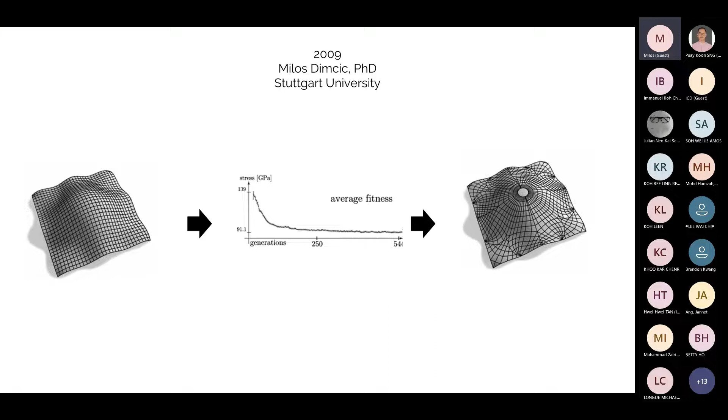As a very basic example, this is a slide from my PhD, already 13 years old now, that shows that if you take a simple input like a grid structure on the left, and you say my task is to optimize this, as an output I get a more optimized structure that costs less, is lighter, and so on. That is an example of that function. In my PhD I showed that with the same number of structural profiles, with the same exact shape of the free-form roof, we can get 3 times less displacement in the structure, 1/2 of the stresses in the steel profiles, just by doing geometrical optimization of the grid.

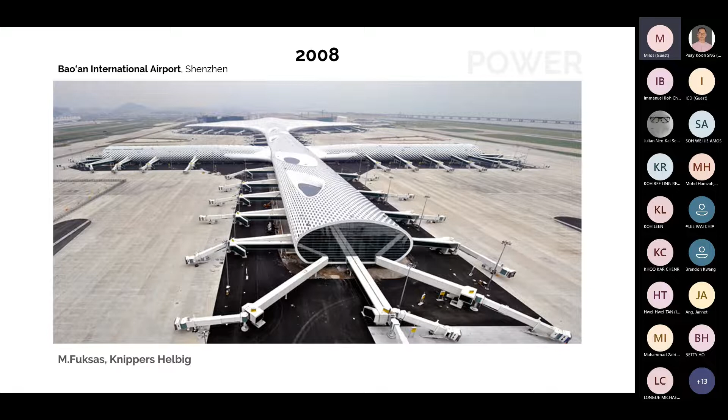So that was an example of theoretical work, but automation is not only about optimization. During my PhD, I worked on this airport, designed by Massimiliano Fuksas in Shenzhen, China. There, everything had to be done parametrically, because it was a free-form shape with a lot of unique elements, and no one could do that manually. There were 300,000 square meters of free-form surfaces. We had these hexagonal panels, relatively complicated and big; one hexagon was like 4.5 meters wide and 3 meters tall.

And there were some additional constraints. We had hexagonal panels on the inside of the airport and on the outside, and the glass surfaces on the outside had to be always flat, which is a challenge because you're populating a 3D complex shape over a freeform surface. Additionally, we had like 20 types of hexagons for which Fuksas literally painted on a canvas which type should go where. We transformed that canvas into Excel tables and then into an algorithm. I could do a 2-hour lecture just about that. But coming back to the question, does automation pay off? Yes, because for the entire airport, we did a complete regeneration of all the facade elements, of all the structure.

Remember that this steel structure in between that you see, it was also generated parametrically. So we did it every week for more than a year. I think we had 72 generations. We regenerated all these facade elements and the entire structure completely from zero, which took just a couple of hours to do. And that shows the power of automation and answers the question, does it pay off?

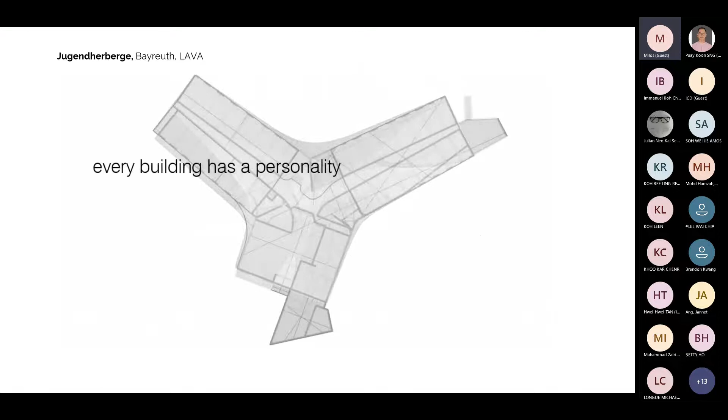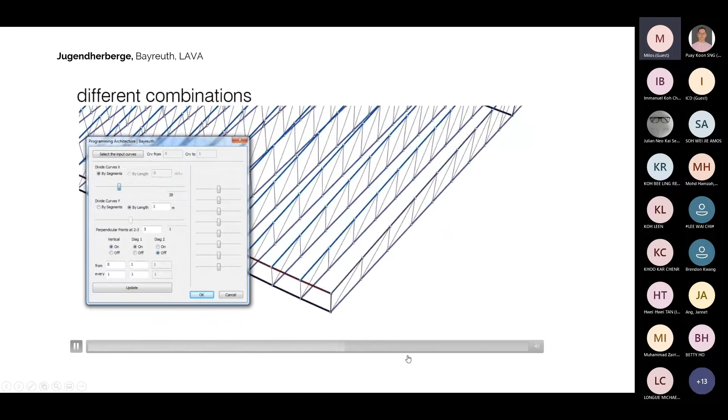We do that sometimes. Sometimes we do parametric design. This is a very old example where we actually had to write some algorithms to explore some design solutions for the structure and so on. This is very early on. This is, I think, even 2011 or 12. But I show this example to accentuate that we do this almost never.

So we do programming after the design is done in order to help actually build the project. That's why I write that this is very rare and that we almost never work with architects, which is the sad truth, and I hope in the future we will do more. But by the end of the lecture, you will see my view on it, and you will understand why we don't work with them that much.

So the question is, who do we work with then, if not with architects? Well, as you know, each project has a lot of phases from the design until it actually gets built. And some of them are static analysis, MEP, HVAC, production. When I say production, I mean the actual production of different elements, steel elements, columns, beams, and so on. So there are a lot of stages, and we usually come at a later stage after the design is over and try to automate everything until the very construction site, even some things at the construction site.

So we try to create these bridges, and you will see in what manner we try to do that. But that's our job. And as I said, we rarely do the design phase.

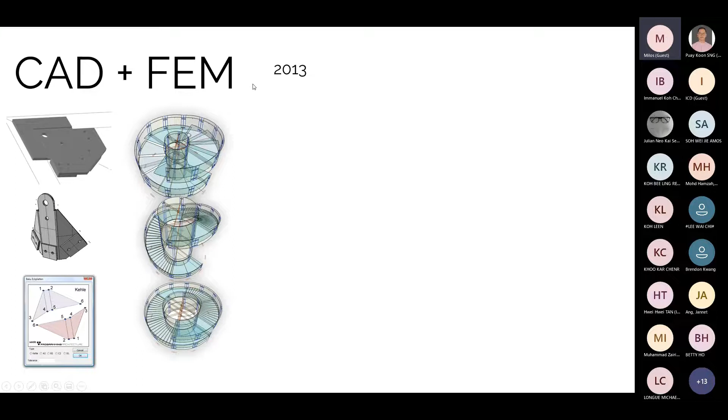So one early example, also from 2013, are these Apple stairs. We did a study because for the Apple Store stairs they did a lot of these models, where they make these completely glass stairs, but the problem was always that they had to do geometrical models and statical models in parallel, and they were always different because the dimensions changed a little bit. So we made this parametric model where not only the geometry is generated automatically, but the statical model is generated at once. So we kind of wiped out the 8 or 9 weeks they needed to build a statical model from scratch every time a new stair design came in.

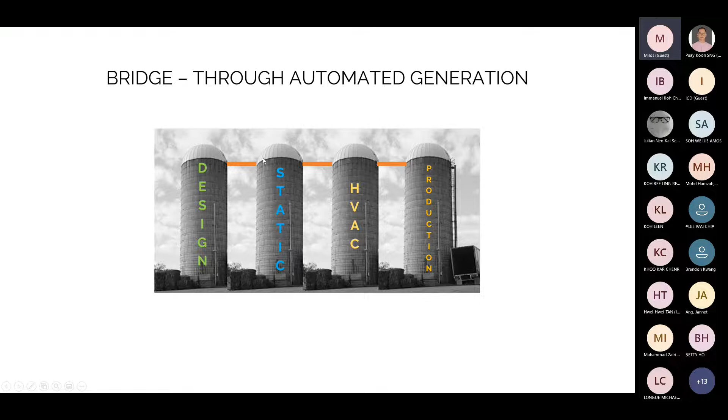So that was an automation where we automated the static analysis, so the building of the static model. If you remember the first slide, the problem is that our industry is siloed. Which means when someone designs something, they give it to the structural engineer, they start building their model from scratch, and so on. So we try to create this bridge by automatically creating a design model and a static analysis model.

So we, for example, made algorithms that automatically read these thousands and thousands of STEP files with these panels, and then had to smartly recognize where each panel fits in 3D and then push it into 3D and so on. And we found a lot of mistakes, actually.

A lot of panels had to be reproduced, but we saved a lot of money by finding those errors before the construction site.

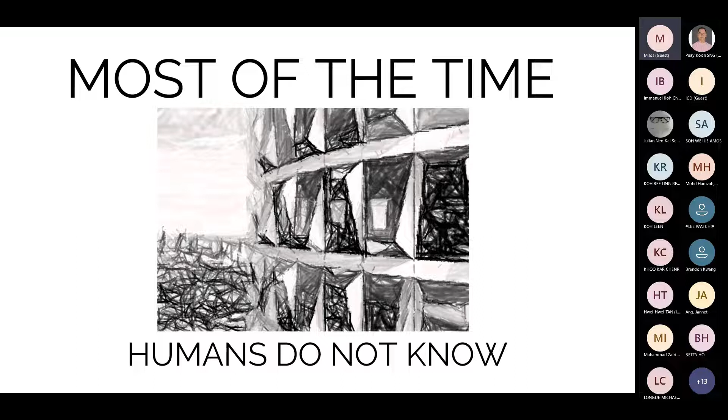And when it comes to programming, most of the time we don't program just the things that we know how should be done. We just need to automate them to do it faster. But we have to program something to answer questions to which we don't know the answer.

Some of these questions came out in this Schüco parametric facade system, for example, that we did together with Engelsmann Peters. And the problem was that Schüco developed this parametric facade system where the architects could choose a type of the facade element. This triangle here is one type. This here that you see is a different type.

And every type has some points, in this case these 2 points here, which architects can freely vary. That means that architects can take these 2 points and move them around for every facade element, and the facade could still be produced at a fairly low cost.

But then the question arose of static analysis, like how do we know where the architects can move those points, what profiles do we need, and so on. So we had to create algorithms that would test different kinds of shapes. We would generate literally hundreds of thousands of shapes like this and automatically do the static analysis for them, a

very complex static analysis. And then we would create green clouds of points where the architects can move, or we would give them different types of clouds for different types of aluminum profiles so that they can choose what they do.

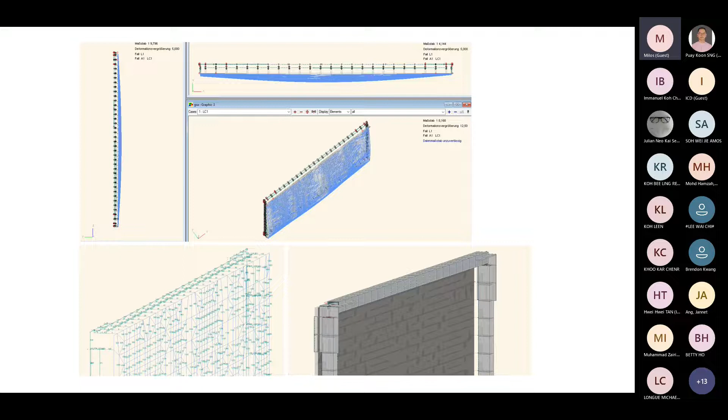A similar thing we did for this Chadstone Mall in Melbourne, where we had a lot of these glass panels, all unique because it was a free-form shape. And then we found out that the standard method to do the static analysis of a glass and determine the thickness of the glass was to choose approximately 4 or 5 glass elements that are considered to be worst case, do a static analysis for them, and then apply that result to all the glass panels.

And we said, okay, why don't we make an algorithm that just tests statically all 3,300 panels? So we did that, and we tested them within a few hours, and then we found the actual worst cases, so we didn't have to approximate them, and we could also make glass thinner at some panels and so on if needed.

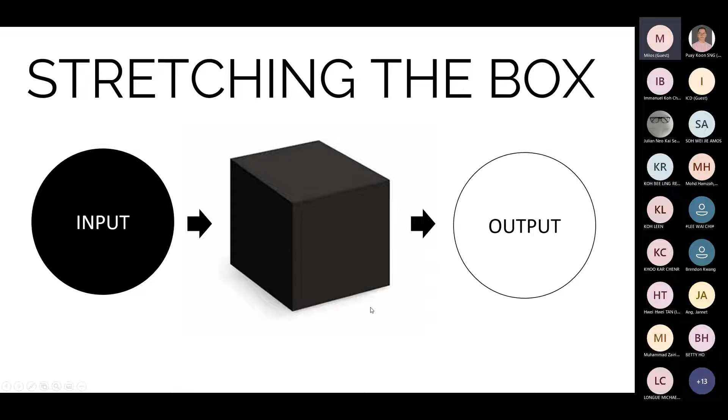So those were some of the examples where we got some input and some output out of the automation. But the question for us is always how much can we stretch this box? Like how simple can the input be, and how complicated can the output be, so that we automate everything in the middle. So on that road, we try to automate a lot of production elements.

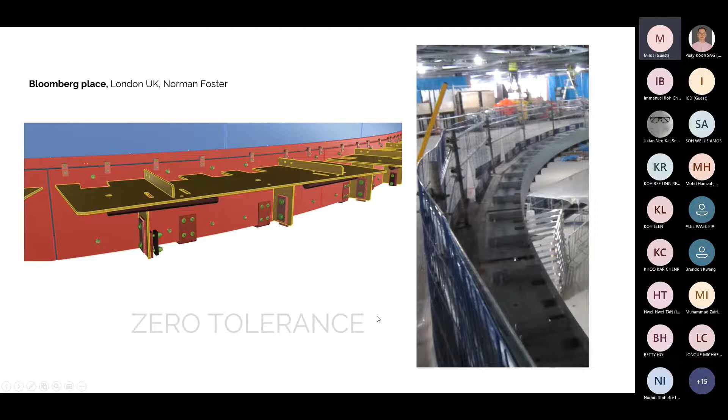And there was zero tolerance. We generated them with less than 0.1 millimeter precision. And we didn't generate only 3D, we generated also 2D drawings just to check on the site, but also all the CNC files for cutting. So everything automated. And in drawings like this, as you can see, with all these measurements, everything was generated automatically. So nothing on this drawing was drawn by a human.

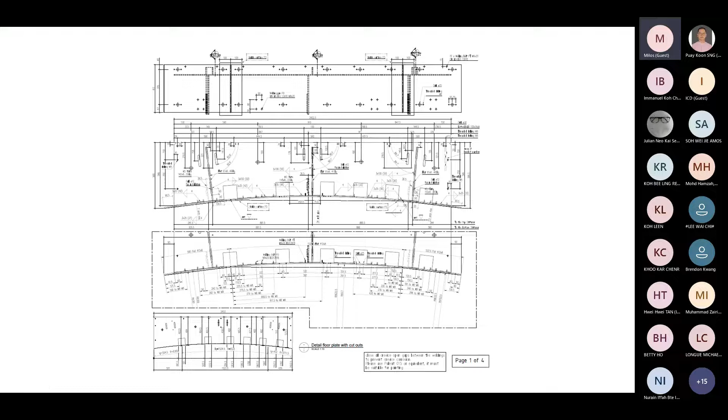I am really against 2D in general, as you will see in a while, but sometimes we had to do this. We try not to do this anymore, but if needed, that can be automated as well. On the Kuwait airport by Foster and Partners, we did a lot of automation as well.

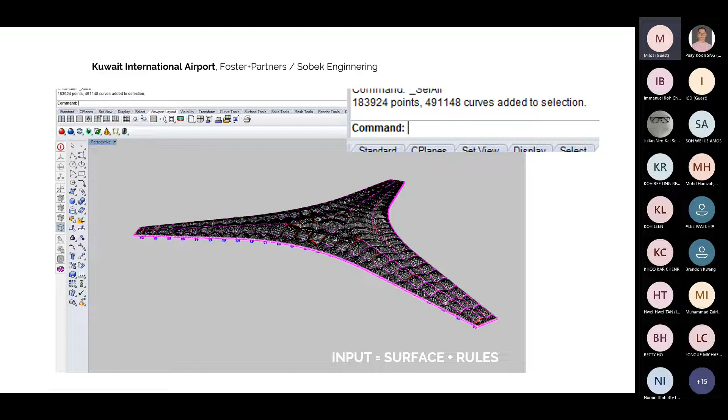It's a very high span concrete shell with steel structure, so it was a very big structure. And as an input, we also got simple surfaces and some rules. As you can see, these are very high numbers. These curves here, almost 500,000 curves, basically represent steel members, and in between those steel members was the concrete. We actually had to generate the entire rebar, the entire reinforcement for the concrete elements, with a lot of rules and a lot of automation. The inputs were fairly simple, just some surfaces and some outlines.

So BIM in itself is also automation. BIM is an attempt at automating the tasks that we used to do before. Before, you used to just draw in 2D, and we used to transform that into a 3D building on the site. BIM tried to automate that by letting us create a 3D model and then automatically create sections and plans and bill of quantities for us and so on.

And the reason why I say this is not good enough, for me at least, is because we have this weird thing of creating very complex 3D models, translating them into 2D drawings, and then translating those 2D drawings back into a 3D model. So from my point of view, this middle part has to disappear, and that's why 2D has to disappear from BIM.

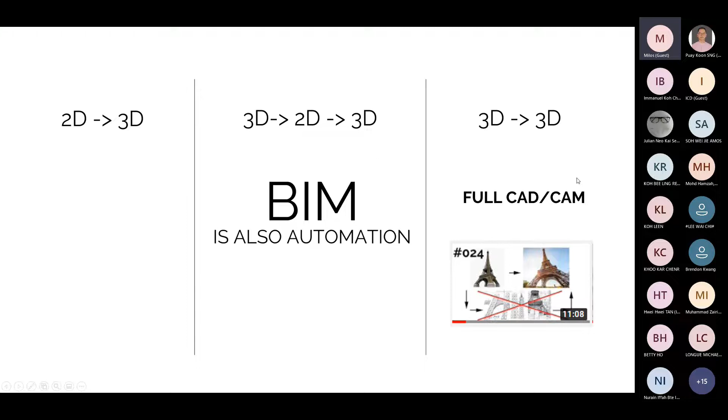And we are moving toward the 3D-to-3D kind of process, where we really try not to use any 2D drawings because we find them confusing and not helpful at all. I did make a video about it recently on my YouTube channel where I talk about it in more detail. But as I said, we don't just talk the talk, we walk the walk.

There is a project we work on right now, and unfortunately, because this is a public lecture, I cannot show anything about it. But it's a very high profile, extremely big project. It cost $2 billion. And in this project, there is an enormous steel structure, and on that steel structure, there's a secondary aluminum structure, tertiary aluminum structure, then some LED screens on it, and so on. So it's very highly complex, but we do not use 2D at all.

So we generate a structural and production model simultaneously. The civil engineers don't have to do anything, don't have to do any modeling. They just get complete models from us, and just have to press calculate, analyze. And there are a lot of structural members—as I said, more than 30,000, more than 90 million works.

Work is a term we use for the G code for the machine, because for every profile that we make—which is all of these 30,000—they're unique for different reasons, and we automatically create G code. So every drill on this profile, every cut, every mill is a work. There are more than 90 million works that are automatically generated, and all of these profiles are then mass produced in a machine.

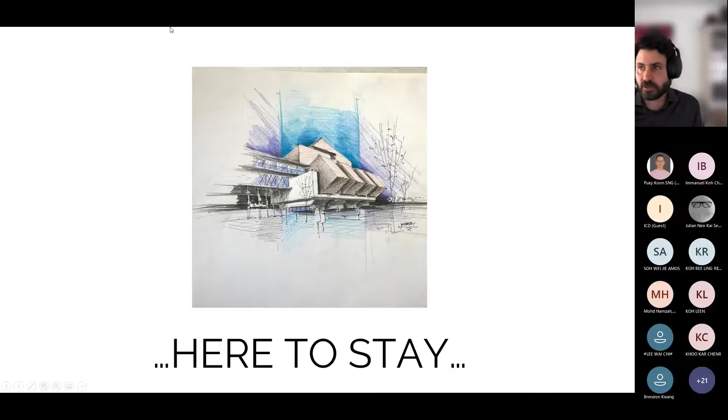In the development of AI, we had a lot of famous events and steps. For me, the interesting thing was that after chess being played human versus human for such a long time, and then human versus machine, where machine finally in the 90s took over, now no human can compete with any machine when it comes to chess or even Go.

The interesting thing for me to learn was that a human-machine team, a human together with the AI, could still beat the AI. That's something when it comes to chess and similar games.

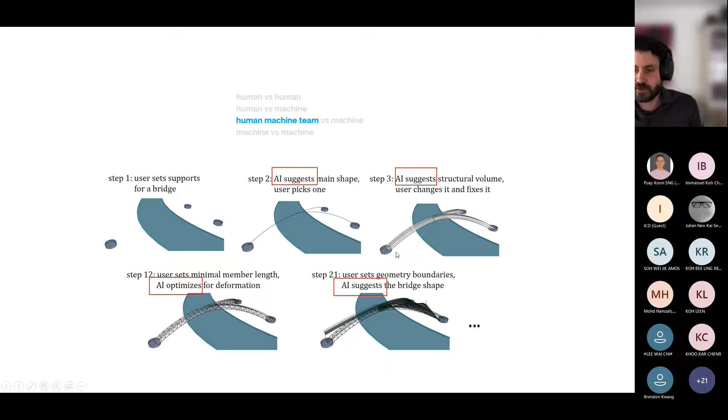Then the user would pick some, then AI would maybe suggest some structural volume, then the user would adjust or fix it. Then AI would maybe optimize a structure over that structural volume. Again the user would choose some, adjust some, pick some of them, and continue this process, refining the model until they came to a solution.

So what they would be doing is playing purposefully, in the sense that the design exploration by the user could be controlled—not necessarily in a bad way, but helped along by the algorithms.

We should use the tools that are already here—that's the point I'm always trying to emphasize. I think Buckminster Fuller and many others have noticed that the construction industry lags behind other industries, and that we usually need 40, 50 years to start using tools already used elsewhere, like robots used in the car industry since the 60s, 70s—we just started using them 10, 15 years ago. There are lots of tools already here; we just have to use them.

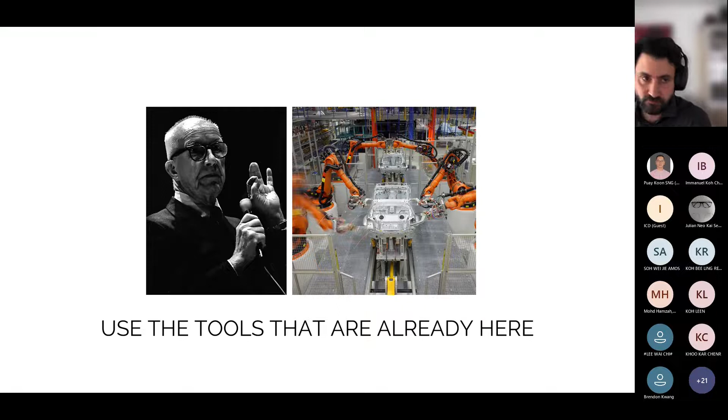And because the design itself is a selection of ideas, I think when we design, we do not have time. We can test 4, 5, 6 ideas, but then we do not have time to test more. Automation can help us merge ideas and automate this process, whereby we could test as many ideas as we can in the beginning, and then come out with more creative solutions.

So I think I'm almost at the half an hour mark, and with 2 more minutes, I will finish with this.

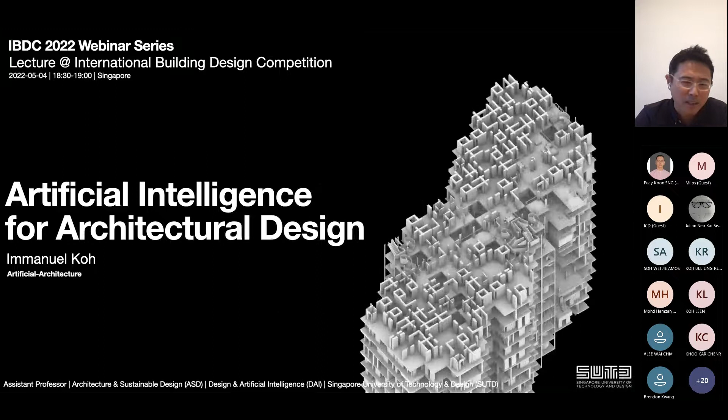So most of the projects that I'll show will be focusing on the more generative aspect of it, more experimental, more speculative, rather than the other more serious work. Serious meaning can be quite boring, so I'm not showing that many of them. So these are some of the kind of work that I do, some topics that I've been looking at in recent years.

If you look at the kind of work that I do, it's a spectrum: more art and design scenarios, such as exhibitions and events like the architecture biennale, and even book design, which won the Golden Pin Award just last year, and also a bit more serious projects that appear in conferences such as the International Conference on Computer Vision, ICCV, quite a high profile AI conference, and other more neural architecture related projects like this one. And of course, NeurIPS, which is also quite a high profile AI conference.

The industry projects include the one from URA, MINDEF, and also the resource support from the National Supercomputing Center in Singapore. So for those who are curious about more recent writing, apart from projects, some projects will actually appear in these publications. You might want to check out some of these. These are very recent, half of them from early this year.

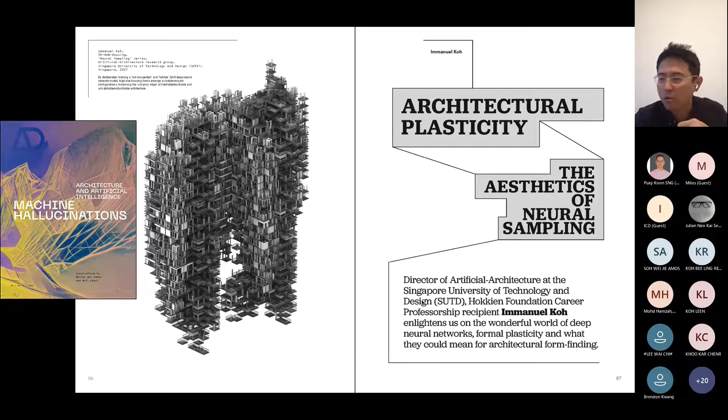Right, so some glimpse of the Architectural Design issue for the discrete. That one was quite some time ago, but nonetheless, it is related to the early work in machine learning. A more recent one, for instance, is this one that you saw in the animation, from the AD Machine Hallucinations. Not so much about automation in this case. In fact, I wrote something about the necessary fallibility of the system for it to go beyond automation. And also this one, the idea of architectural plasticity in relation to 3D generation.

And also recent projects: those who are in Singapore may have seen the exhibition at the Arts House just a month or so ago. And also some projects exhibited elsewhere in Australia and Venice, and recent NFTs released from AI-generated furniture.

So now returning to our lecture proper, let's look at the lecture title again. Clearly very straightforward: artificial intelligence for architecture design, which is basically the use and application of AI models for the design of architecture. Or in very simple terms, architecture design being the creation and composition of interrelated forms and spaces, typically manifesting themselves as physical buildings.

Interestingly enough, if we were to flip the order of both terms and change the preposition between them, you could read it like this: architecture design of artificial intelligence. That is, designing the architecture of AI models. So in accordance with our contemporary understanding, AI models are commonly understood as deep neural network models.

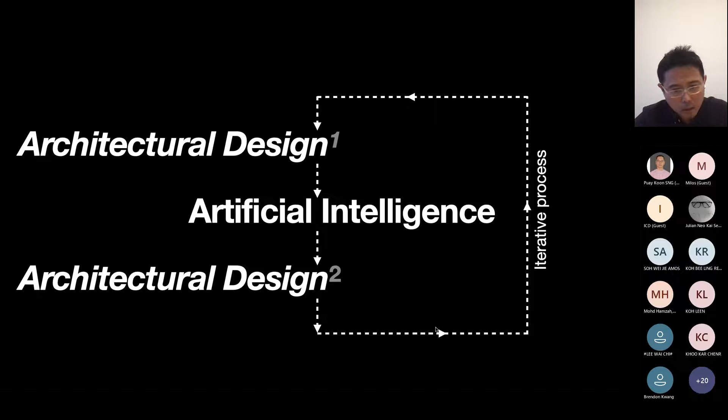So diagrammatically, before I move on to the more visually interesting projects, this is what we get. So the proposition here is that if the architect is to gain true design agency, he or she should not only use, but in fact also design the architecture of the AI model, creating this sort of iterative process or feedback loop between the architectural product, meaning the building, and the intelligent process. So let me show some examples.

Usually this is quite an easy entry for those who are unfamiliar with AI models, because it is an example of a very simple book that was recently produced at SUTD, and which won the Golden Pin Design Award for its innovative use of AI for book design.

So essentially what we're seeing here is every single cover is different, and there are 700 of them curated from a theoretically infinite number of versions, generated by this AI model called the Deep Generative Adversarial Network, or simply the acronym GAN, with a training set consisting of visual archives from previous years of student architecture work from SUTD, since 2017 in this particular case.

So the design concept then is to ask the AI model to generalize from what it's seeing from the archives, to unearth these latent features, and then, once it could generalize, generate similar versions that are representative of what it has seen, meaning the training set.

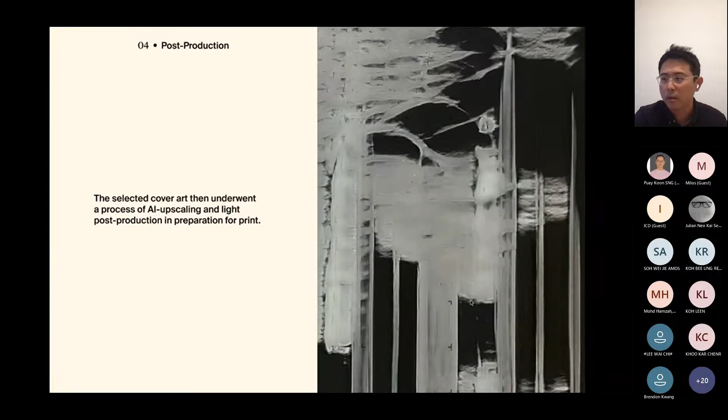So this is the process where the human comes in, in the sense that he or she would change the training set, improve it, or change the neural network architecture, or change the hyperparameters, things like learning rate. And here, for instance, because it was trained and generated with low-res imagery, you need this additional AI model to do a super resolution process so that it's suitable for printing at very high resolution.

So in the book, there are 4 pages or so to explain the whole process. So if you are curious, you can also get the book.

Okay, so in fact, today I'll show 2 main forms of sampling. I usually use the word sampling because it is actually taken from my PhD, which is called architectural sampling. But essentially many of the projects I will show are based on 2 main families of AI architecture models. On the one hand, you have the AI architecture design, so designing of the architecture of the AI model, which is closer to what I showed you just now, the GAN models, the variational autoencoder models, where you ask the model to learn a continuous space of representation of what it's seeing, and then you sample it and generate the output at one go.

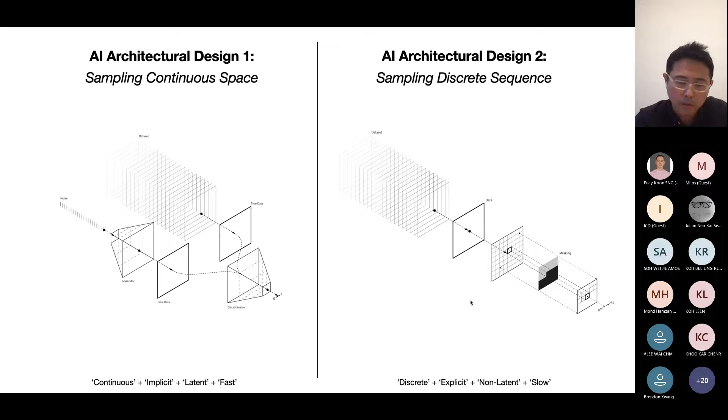On the other hand, there are models, in fact, there are many, but these are 2 of the ones that I really like. The one on the right is based on a different way of working, that it generates as a sequence, discrete sequence. So it learns the distribution as a sequence, and then it generates one at a time. I'll show you an example, like the NFTs that I showed you just now. It's based on this sequential way of modeling.

So the first one, yep, this is way more simplified than the one I showed you, just because it's easier to have a quick example, just so that you could slowly understand the kind of work that I'm doing. So this is an example where we know that in 2020, the Serpentine Pavilion was not actually built because it was postponed due to the pandemic.

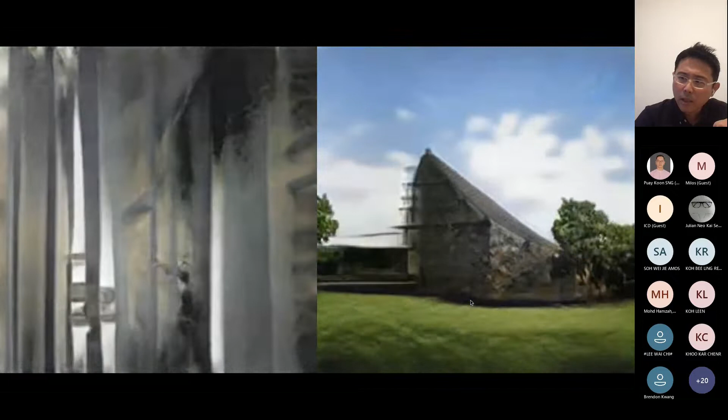So the idea of this project is to learn from a training set of the previous 20 years of pavilion design. It's interesting also in this case because the site is exactly the same. The budget is similar, and many things are very similar. So it seems to make sense to train, just like the book that I showed you just now. We do something similar for the Serpentine Pavilion 2020. So again, this is that continuous space of exploration where we sample from that latent space that the model has learned, and it generates.

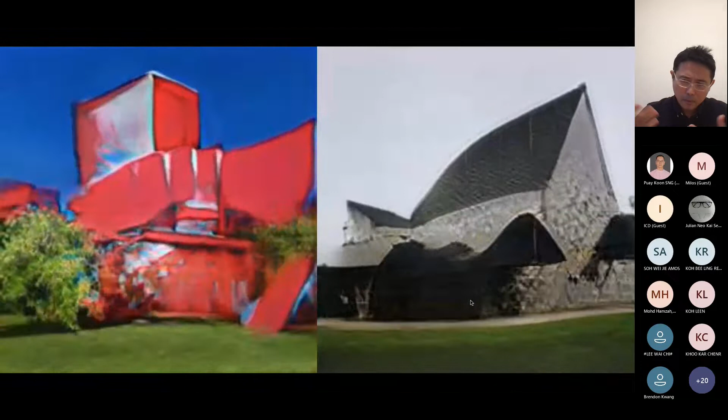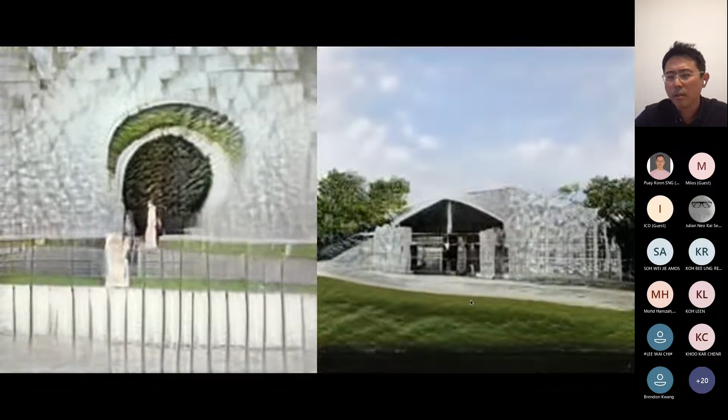So what we're seeing here is not frames in a video, but it is actually moving in that very high dimensional space with many parameters. And therefore, here sometimes you see features of designs by some architects. Let's say here, Sou Fujimoto on the left, and then sometimes you see Peter Zumthor's, and so it's kind of doing what was intended, right? To learn what has been built previously in 20 years and see how we could sort of remix them in interesting ways.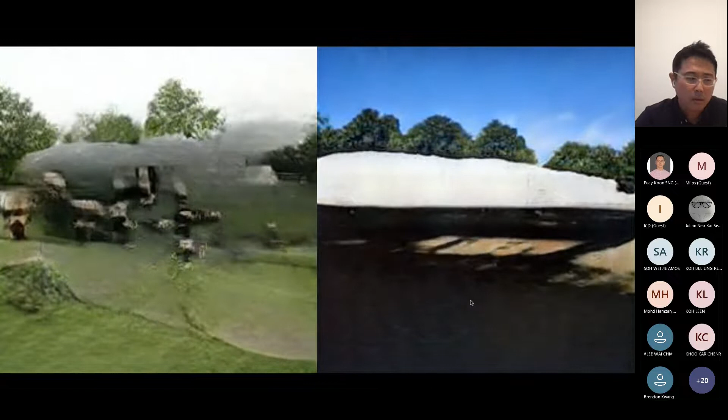In fact, during this process, there was a need to balance the data set. Apparently, during the data scraping, there were too many images of Sou Fujimoto's pavilion, probably because it's relatively popular. And therefore, there's a need to do so, which means that we could also control the performance or the generativity of the AI model sometimes just simply based on the data set itself, if you could curate it creatively. Let's move on.

So these are some examples of the generated output. But to go one step further is to train another AI model, say, given one of these images, can you tell me what's the proportion of that image looking more like a Gehry or a Zaha design or a Sou Fujimoto or Ito building? So in this case, these are the percentages. The rows represent the different generated images from our AI model, and it's showing the percentages of fidelity or resemblance to what the model has learned, what is considered more Frank Gehry or less Zaha.

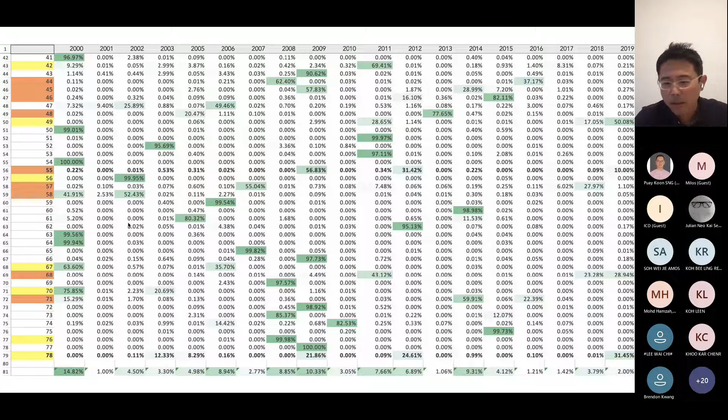So I think it's interesting also because the AI becomes a kind of reflection of the ways in which we could think about our design process and the way we perceive and judge design. So let me move more quickly to the more three-dimensional, bringing you really back into a more three-dimensional representation of AI models.

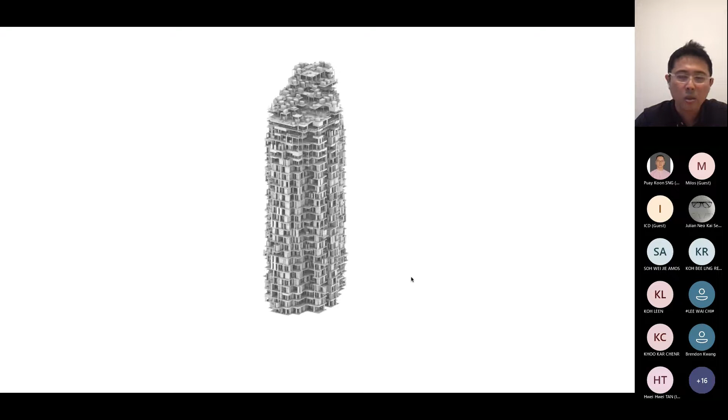So we've gone through this quick video so you can have an understanding, and I will look at snippets of the video later on in the subsequent slides. So what we're seeing here now, instead of these morphing images, we have these morphing 3D models in high resolution, where ideas of circulation, vertical circulation, corridor connections with high-rise apartments are being learned.

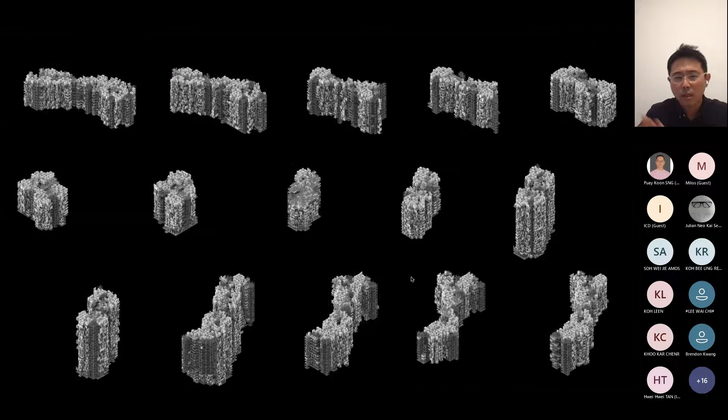And so here is the exterior and the interpolation. And this is the section that we cut from the output. So rather than generating an image, now we're generating an entire building block, which you saw just now in the interior cut, the section cut on the first slide of the presentation. So this is kind of a zoom out view of it.

We see that it's behaving correctly in the sense that the understanding of what constitutes a workable high-rise building is that it has the right length of corridor that is connected to the vertical core, the staircases, the lift core connected to the apartments, and it shouldn't be too thick, too thin.

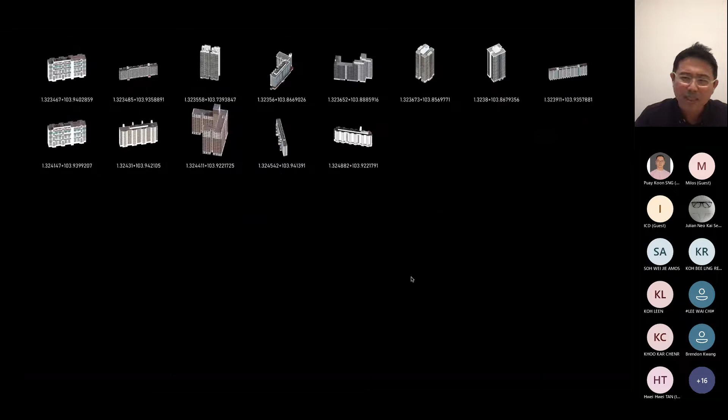This is an example of clustering, actually a UMAP. These are the data sets, and the two numbers at the bottom represent the geolocation, lat long. And these are real buildings, in the sense that these buildings exist in Singapore, and these are high-rise buildings. And so here, just like what we learn from image, we can also learn from 3D models.

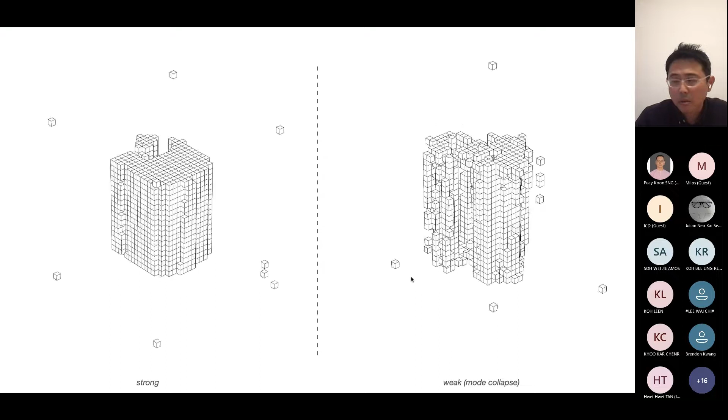Just like we train the image, here we see the training is trying to converge. As you move towards the end of that sequence, you see it's becoming more like the building because it's converging with greater confidence. So these are two different AI models, different in the sense that they have been trained differently and there are differences in the hyperparameters. The one on the left represents seemingly more workable meshing. I simplify it just so that it's easier to understand.

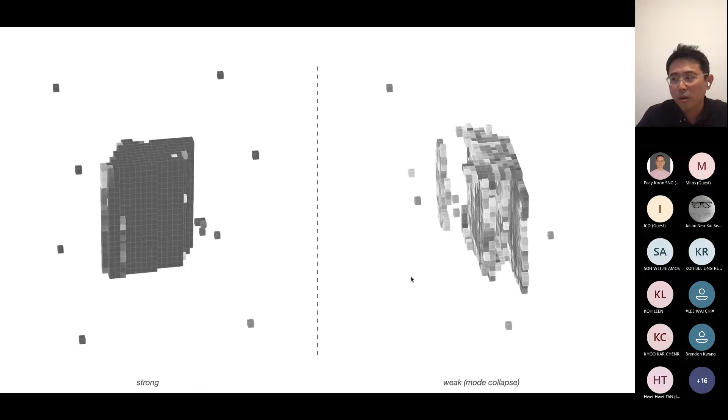On the right is suffering from the lack of confidence in the sense that every voxel is not very sure because they are less black, more whitish. In this case, it is visualized as being less confident of their position in that space. So therefore, we could see that deep neural networks are actually kind of alive because every time you train it, it will be different. So even with the same number of runs, the same architecture, the same hyperparameters, they will be different.

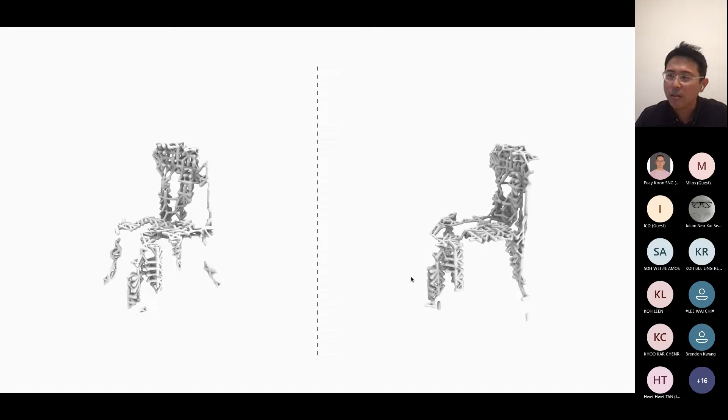This is an example of if you even mix different kinds of training set, let's say in the case of a chair and a building block, what do we get? There might be a kind of in-between, just like maybe what Milos mentioned about the speaker, is it a speaker gate? So what's a chair building, for instance? And that kind of pushes the conceptual constraints that we may have about things.

Just some images. So in this case, this particular model has been trained for 2050 epochs. I'm just showing the interpolation and the zoom in of these. They are very high res. For the interpolation, 2050 epochs. I think I should move quicker. And so again, a snapshot of what it means from the first.

So when we talk about epoch, it's like in an evolutionary sense, that the model is evolving in its understanding of what it's seeing. I won't use the word understanding, but accuracy in approximating what it's seeing and what it's producing. So as we move to the 75th epoch, the 75th generation onwards, it's becoming more building-like. In the beginning, it's kind of this blobby object that makes no sense, whereas over here we see staircases appearing.

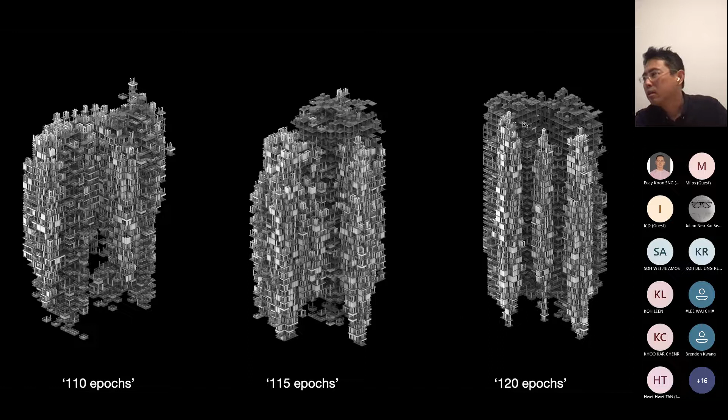Okay, so again, zoom in into the example where we could deliberately ask a toddler AI model to generate something that is less correct, but interesting enough. So here I'm showing a less matured model that generates something that looks like a building, but quite messed up because the top part is a mess. And as it gets older, 5 years at a time, it starts to understand circulation and apartment distribution.

Of course, in this case, it's very unusual because when we do high-rise design, we would never be so generous as to have most of the building be circulation spaces, communal spaces. Instead, we would want to increase the floor area for the sellable areas. So again, the AI is kind of pushing what we are comfortable with typically.

PK, how much time do I have left? You can continue for, let's say, about 5 minutes.

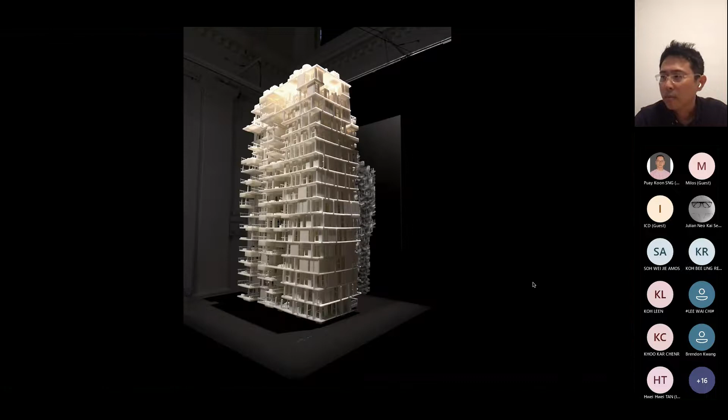Some examples. So what we're seeing here is the 3D printed version of the interpolation at the scale of 1:300. This is 1:100, a fragment of a block. Some zoom in of the parts, and very quickly the discrete sequence.

So here, this NFT that was released some time ago is actually for a charitable organization, which has to do with the idea of abuse and the underprivileged, and therefore there is this deliberate kind of intention to create these chairs that look inviting and uninviting, strange and yet familiar. Therefore, a kind of an artistic undertone to it.

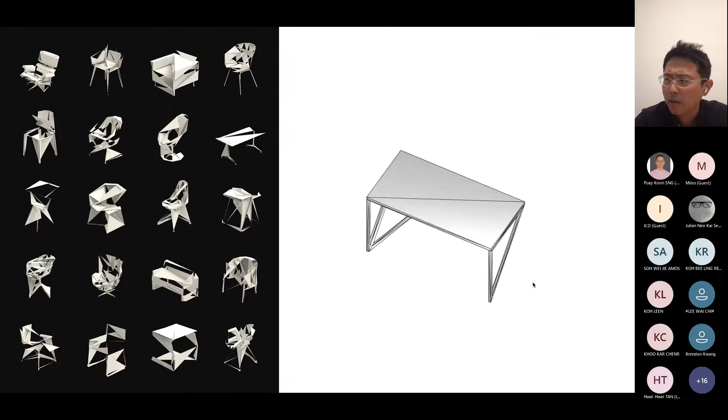So these are actually available to be purchased. I'm not asking you to buy it, but showing examples of how to move AI generated artifacts into that kind of a blockchain scenario. This is a quick process; on the right, it's just an example of the data sets that are being used to generate the furniture on the left.

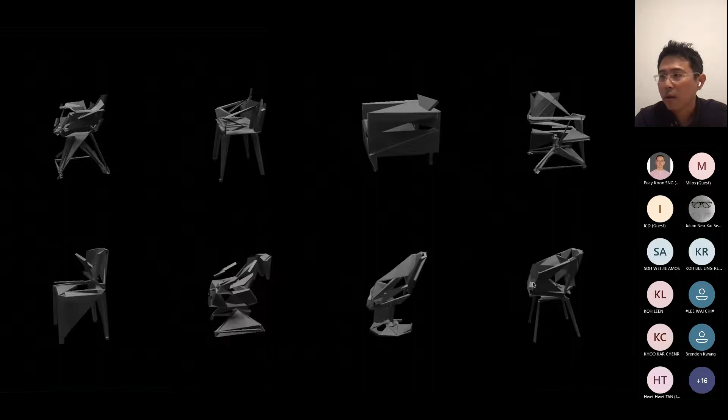And here what we're seeing is that it's learning the distribution of the vertices and the faces. And although it looks like the entire object is generated at one go, in fact, it's generating one vertex at a time, and then creating faces after that, one face at a time also. These are 3D NFTs that are also AR ready.

Last project will be this. Those who are students of architecture will be very familiar with the Barcelona Pavilion by Mies van der Rohe. So the question is then, can we also use single data to generate variations of it? In this case, it is quite possible. Of course, I removed the roof of the Barcelona Pavilion. Surrounding it are the variations of it based on learning just one data point, in this case, one single model.

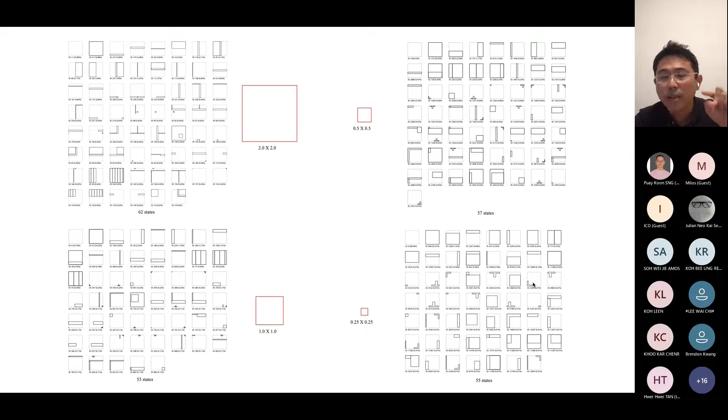So again, I probably won't have much time left, but rethink about how to numerically represent even a floor plan. Here, in a machinic way, almost like a convolutional way, we're seeing grids, but we can see it at different resolutions, 0.5 meters or 2 by 2 meters or 1 by 1 meters. These are the same discrete set of modules that's able to represent the full Barcelona Pavilion.

And with that, here, for instance, is without machine learning, in the sense that it's just using a uniform probability distribution to generate the parts and put them together. No intelligence, in the sense that it doesn't have a sense of probability distribution in the right way. And in this case, just looking at the frequency count of the training set.

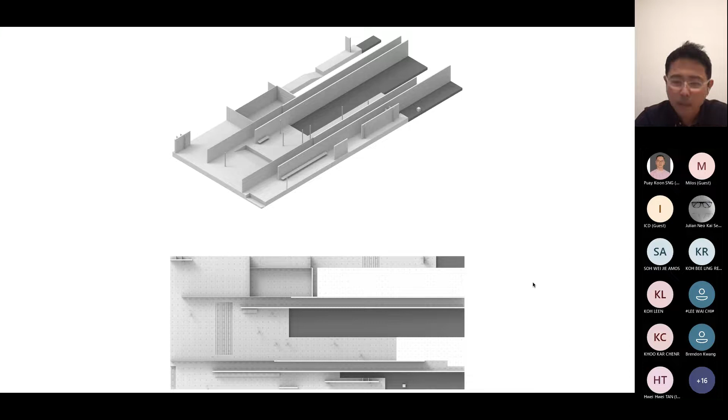But we can begin to tweak the model so that it becomes biased towards a certain formal preference. Here, the horizontality, the verticality, in this case much more controlled, in the sense that it's considering a larger neighborhood in its generation. So I think I'll skip this part because we're at the end of the lecture, but this quick video is the last project.

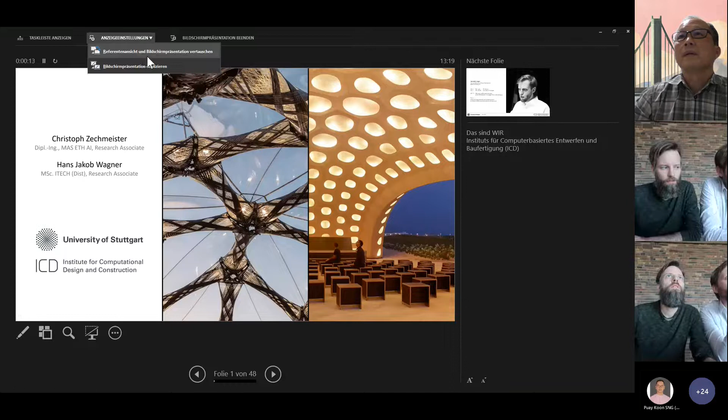Okay, looks like our two Stuttgart researchers are in. Hello, Christoph and Jakob. Can you see now? Your mic is off. You're muted. Okay, sorry for that, now it should work. I guess you can see the screen now, right? Yes, okay, perfect, sorry for that.

So yeah, now with the pictures, we're from the ICD in Stuttgart. Me personally, I'm coming from the Technical University in Vienna. I'm here in Stuttgart for 6 years now. My focus is on computational wood architecture at the institute, which goes hand in hand with robotic production systems. When I started here, the ICD was already known for pavilion-scale structures that tried to materialize the advances in computational design, many made already in the 90s and early 2000s.

The core innovation here was arguably the direct link between the digital models and the affordances you can generate through computational design methods, directly linked to digital fabrication and robotic fabrication, opening completely new avenues toward what you can actually build. But after doing that for a couple of years, the question became stronger and stronger: how to bring this to a bigger scale. This is what I want to present today.

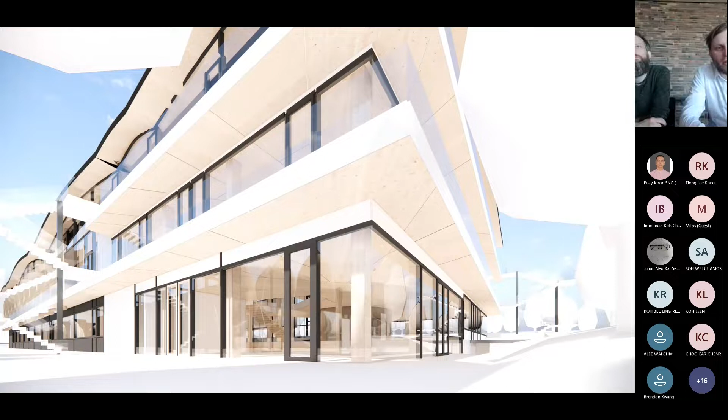At the end of the presentation, I also want to give a quick outlook on how we believe the same methods and technologies can be transferred to more regular building projects. This is a field where these technologies can have a big impact on how we can make our built environment more affordable and adaptive, and give it higher spatial quality. All of this in our institute runs under the umbrella framework of co-design, which widens the horizon of the initial idea of integrative design.

So you try to integratively bring together different disciplines, different aspects within the design, rather than starting with an architectural concept and then later trying to figure out how to actually engineer it, and then even later figure out how to build it. In this co-design framework, we try to bring all the experts and disciplines together from the start, leveraging this potential for innovation, as it represents a comprehensive set of knowledge on the planning table from day one.

A big reason how that is actually possible, also from an organizational point of view, is that everyone is working on the same model, and everything in the model is responsive and adaptive through the generative algorithms that run in the background. That means we can very quickly iterate through a lot of design iterations, and everyone in the team can fairly easily make changes in the model.

Then relating to the robotic fabrication, we use all the data in this computational model directly as a control architecture for the robotic fabrication. So we jump over the semantic gap between the designer and the fabricator, where a three-dimensional model is collapsed into a two-dimensional plan and then needs to be interpreted by the fabricator. Instead, in this case we're directly streaming the data from the model to the machines, which then know exactly what to do. As an example, here is one of the cassettes we assembled for the BUGA Wood Pavilion.

You can see the two robots assembling these cassettes fairly quickly and efficiently. It's fully automated, but also automated in the sense that each cassette is actually unique. So we try to expand the notion of automation with that.

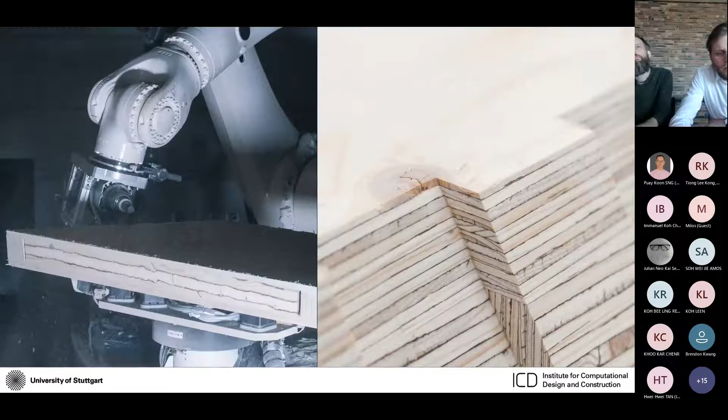These cassettes are then machined also within the robotic platforms. One aspect we are always happy to show is that although robotic fabrication technologies are not necessarily discussed as the most precise in the industry, we actually showed you can work very precisely with these machines to establish interfaces that work effectively with zero tolerance, and still assemble these pieces fairly easily, even though all the pieces have direct contact, which is of course only possible if the assembly accuracy is fairly high.

With that, we constructed the pavilion in 2019. It served as a flexible event space, and you can see how the acoustic contraptions, the lights, and the structural design are all embedded within these systematically very simple cassettes, unfolding this simplicity through a very adaptive and performative global shape of the pavilion.

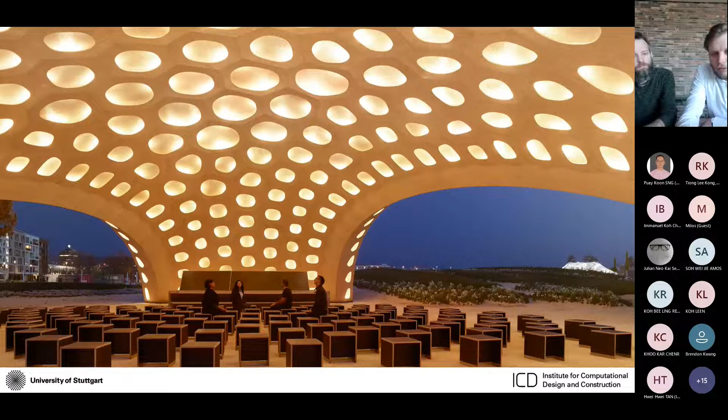Now, if you look at what's happening still in most industry applications today, it's fairly different, also in the timber construction industry, which is actually one of the most innovative fields within construction. We still see a very close-minded view on how we are able to build with timber, and this is quite uncanny, especially in terms of how it relates to the history of architecture, where this idea of modular, standardized, and systematized building was very much trendy and pushed forward in the early and mid 20th century.

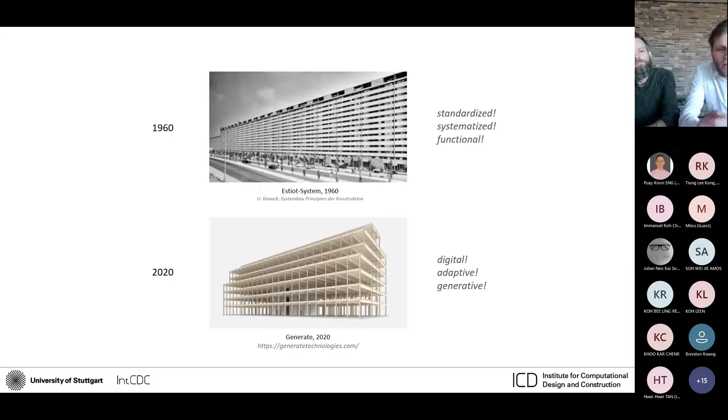We know, of course, that a lot of that dramatically failed, and still, even though we give this idea new words and embed the same systems in digital frameworks, on a very basic level it's still fairly much the same. Just by it being digital, we don't believe it's also going to convey a drastic change in quality.

So what we are doing at the ICD is really trying to fundamentally rethink and push the technology of timber construction to leverage the same potentials we can currently achieve with concrete structures, which is basically quasi-monolithic slabs that have multi-directional structural spans. By doing that, we try to offer new design possibilities to timber structures in multi-story construction.

We're currently testing this on a small-scale prototype called the IntCDC Campus Lab. It's a fairly simple, as-small-as-possible demonstration of this idea, with three columns and two slabs spanning in three directions. They showcase a span of 8 meters, which is fairly decent for a timber structure with a flat ceiling. We hope this might become the new skeleton of a lot of the built environment that we can construct with this kind of technology.

With everything being out of wood, there's basically no steel within the connections, and that, of course, could be a big step forward towards a sustainable built environment.

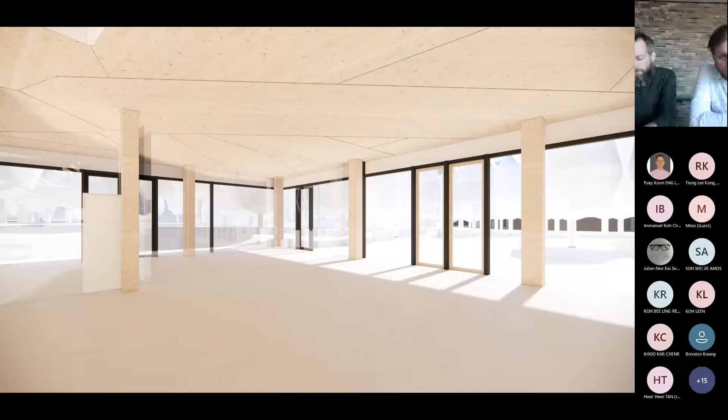Also raising again the spans from 8 meters to 12 meters, and not only 12 meters in one direction, but effectively 10 to 12 meters both in the strong and in the weak direction of this kind of systems. And with that, we can afford a fairly flexible architectural structure where you can put interior partition walls throughout the years, always reconfigurable, whereas the main structure can remain as long as the building is standing up.

And with that, we hope that we can bring the same kind of qualities that we can achieve today with concrete. We try to achieve the same capacities with timber construction and make them affordable through the automation and the automated design that we develop.

Yeah, with that, I would give over to Christoph, who's going to talk about the fiber systems.

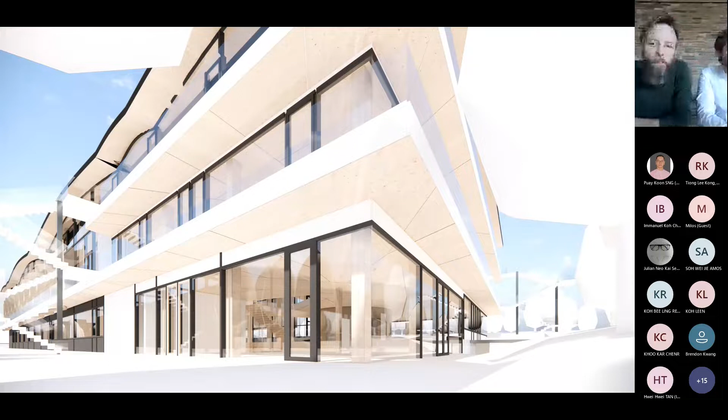Thanks, Jakob. My name is Christoph Zechmeister. I'm also a research associate at the ICD. I'm trained as an architect. I used to study in Vienna and in Zurich, and I joined the ICD a couple of years ago in 2018 as part of the research team on fiber composites, which is my main area of research. My PhD is embedded in the Cluster of Excellence IntCDC, which is short for Integrative Computational Design and Construction for Architecture. And I'm focusing on the co-design of robotic prefabrication systems and architectural fiber structures.

So if we look at how fiber composites are usually created in the industry, it becomes immediately clear that those methods are not very well suited for the construction industry or for architecture. It heavily relies on complex formwork, and producing such a mold is obviously very expensive. It's also very labor expensive. And while this might be feasible for industrial manufacturing of products or for mass production, where the mold can be reused many, many times, this is very problematic in architecture.

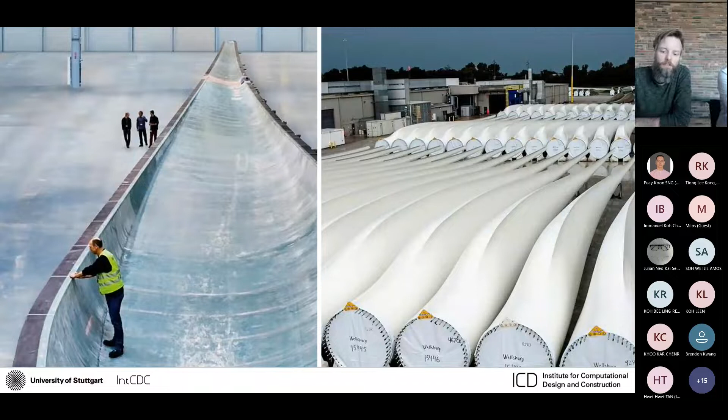And looking at the question, why would we even want to build with fiber composites in architecture, we can see that this kind of material has very high potential for application, especially in large scale and long span structures, if we consider the strength to weight ratio of those materials. So they are very strong and they are very lightweight.

And the material we are working with are fiber rovings. So basically those are untwisted parallel fiber strands, and they are anisotropic. So they have different properties in different directions, and we can use this property to our advantage. And we can create controlled anisotropic fiber arrangements and can match the stiffness and the strength of this resulting composite to the direction and the magnitude of the occurring loads in our structure.

And that gives us a lot of control about the material amount in specific areas, and it allows us to extensively customize our structures. And that again contributes to a very high material efficiency, which is very important if we consider that construction is one of the most environmentally problematic human activities. And here, being efficient with material expenditure becomes a key factor for sustainability.

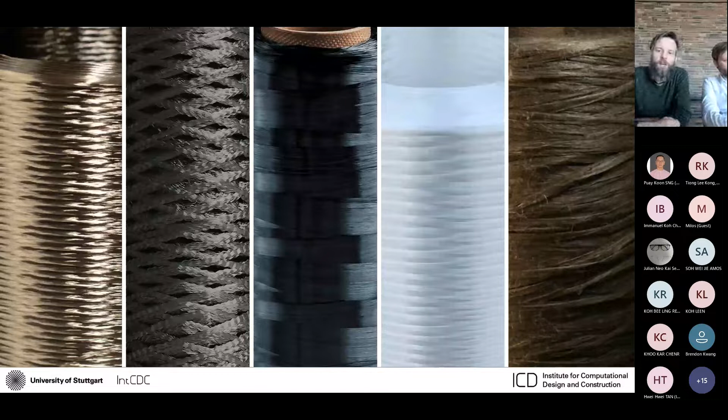The fibers span freely in space between those boundary frames, and the hyperboloid shape of the composite emerges only from the interaction between the fibers. And that's at the same time a key component of fibrous form, where we need to think about the composite not as something that is a passive imprint of the mold, but it's rather something that emerges from the complex interrelations of the fibers in space and time during the fabrication process. And this also demands a much higher level of integration of fabrication into design and engineering.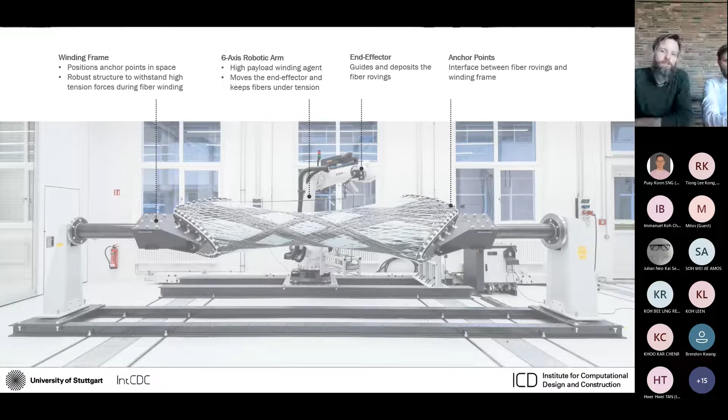There's a 6-axis robot arm, which is the main fabrication agent. It carries an end effector, which guides and deposits the fiber rovings. We have a winding frame, which positions the anchor points in space, and we have the anchor points themselves, which create the interface between the fiber rovings and the winding frame.

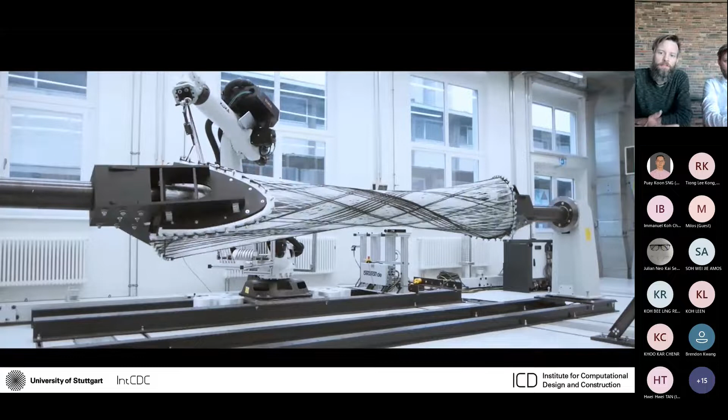And this is what such a setup looks like in action. So the robot pulls the impregnated fibers through a tube-like end effector. It hooks it around the anchor points along the frame, and it keeps traveling back and forth between those frames until the composite reaches its desired thickness.

So how can we design for this continuous process of formation, where basically we have a non-linear process and we don't really know the end result, like this kind of equilibrium state that the fibers ultimately assume? And here the continuous nature of those fiber filaments demands quite a different design methodology than what we are used to in conventional building systems, where we conventionally combine discrete elements in one way or the other. Here we don't have that. We have this infinite fiber that we somehow need to manage, that we need to organize.

And we do that by defining the sequence of the connection points, so basically in which sequence we connect those points. And we call that the fiber syntax. And that kind of gives us the recipe for those components and gives us the means to describe the fiber layout of those components. And this fiber layout, we can split in different layers. We can break it down into this layer configuration, where each layer caters to a specific requirement of the component. And this gives us a very flexible tool to specifically respond to local requirements of the structure.

But of course, fabrication and design of the composite component is not everything. That's only part of the bigger picture, and Jakob already touched on that. We also need to consider engineering methods, construction processes, building and material systems at the same time, which is what we call co-design, and which ultimately is what enables us to really exploit the full potential that those composite materials offer to us, and at the same time also use the computational power that we have available today. It also enables us to complete large-scale architectural composite structures on time and on budget.

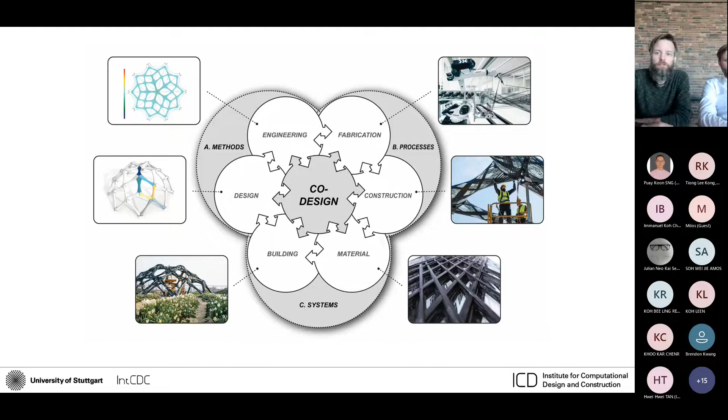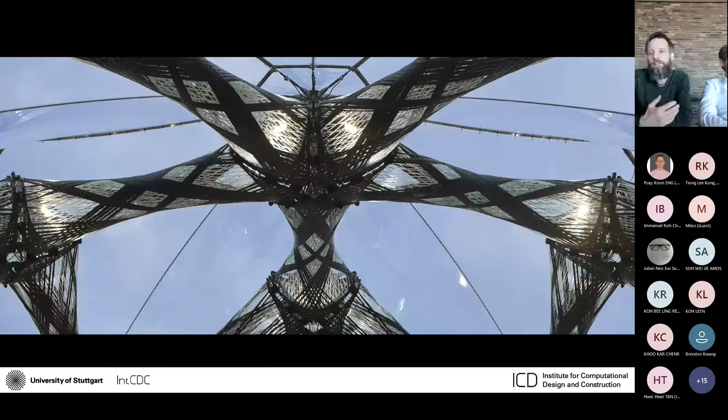And one of those we can see here. So that's a large-scale, long-span structure that we did in 2019, the Buga Fiber Pavilion, for the Bundesgartenschau in Heilbronn here in Germany. It's a dome structure that has a span of 23 meters and a surface weight of only 7.6 kilograms per square meter. And this low weight is facilitated by the high amount of customization that I just explained before with the layer breakdown, where we have a high degree of adaptivity of each fiber component.

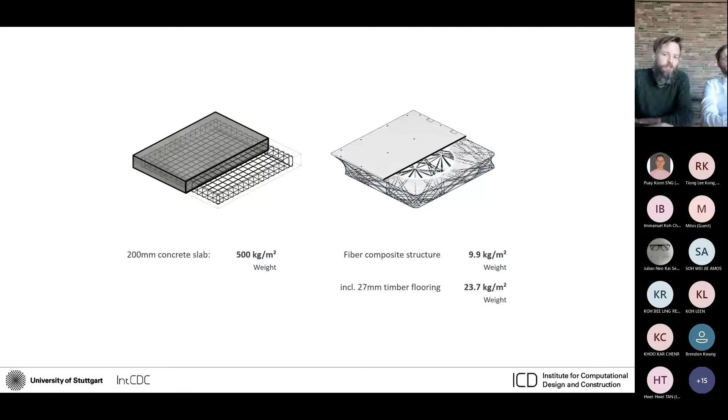So the Buga Fiber Pavilion demonstrates the potential of composite structures for long span applications. But can we also expand this idea of robotically manufactured fiber composites towards an inhabitable multi-story building system? This is what we try to do here. And in this diagram, we can see a modular composite wall and slab building system, which uses a very simple and compact fabrication setup. And if we compare a conventional concrete slab to a corresponding fiber composite part, we will see that obviously with the fiber composite, we can be significantly lighter. And with a conventional concrete slab, we have to accept all kinds of redundancies in favor of mass production, whereas in the fiber slab, we can really focus the material effort on structurally critical areas.

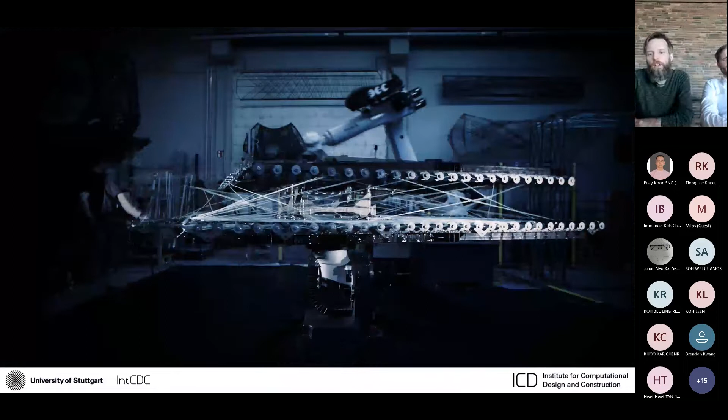In terms of fabrication, that was quite a simple and compact system. We used a 6-axis robot and an additional turntable. The production setup easily fits a standard shipping container with the idea to be later moved on site, act as a mobile factory where it could carry out production, but it could also be used in the future to expand or convert existing structures. The size of the elements is very manageable, so it complies with conventional shipping standards. It can be put on a boat, it can be handled with simple tools such as a pallet truck.

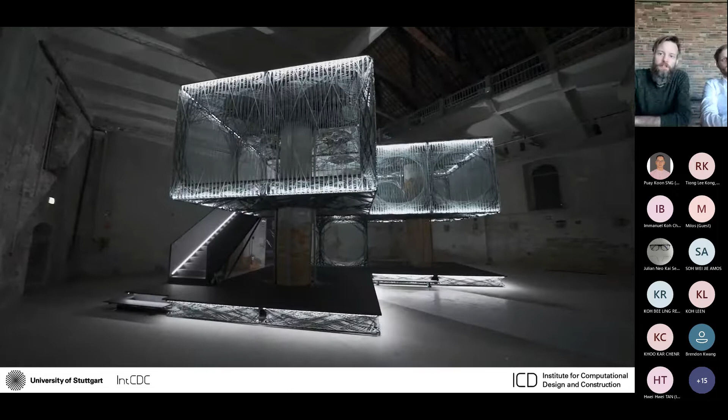And this was the result, a modular multi-story composite slab and wall system that we exhibited at the Venice Architecture Biennale last year. The structure consists of 30 load-bearing fiber components, 20 slabs and 10 walls across 2 floors. And it showcases a new kind of material culture of dematerialization that is based on digital construction methods and that leverages the potential of these highly anisotropic materials.

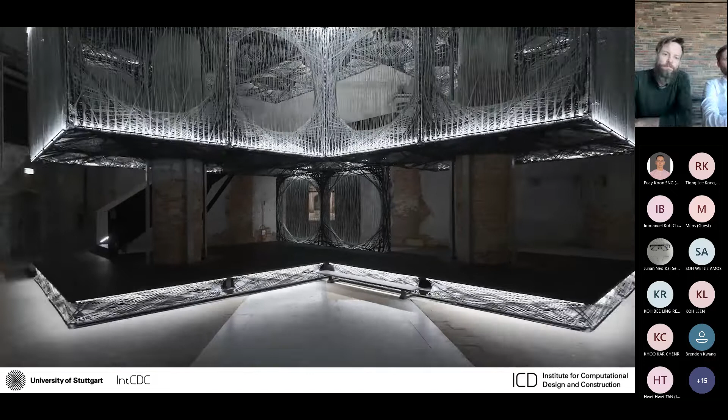So far we talked about robotic prefabrication more as a means to efficiently produce locally differentiated composite structures. But we can also turn this inside out and actually use robotic prefabrication as a catalyst to develop new fiber structures and to expand the fabrication solution space as well as the morphological solution space simultaneously. And we're currently trying to do that by developing new, modular and also reconfigurable prefabrication platforms in the course of a multidisciplinary research project together with mechanical engineers and aircraft designers.

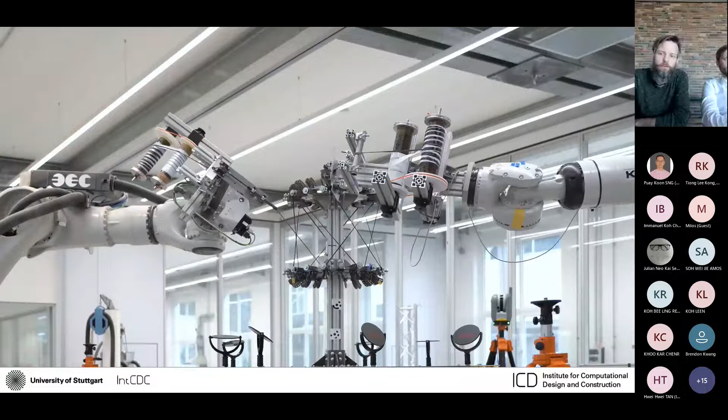And instead of a single robot as a fabrication agent, here we are basing those platforms on robot teams, which collaborate. So they work together to create new component typologies and fiber layouts. You can see this here. This was a test where we investigated different kinds of two-robot fabrication strategies. In this example, two robots are simultaneously winding on this piece in order to finish this component.

Another key point of our research is the investigation of alternative material systems. Natural fibers, such as pictured here, have recently gained a lot of significance as a more sustainable alternative to carbon and glass fibers. In the construction industry, however, they are almost non-existent. And if we consider the fact that construction is environmentally problematic, it becomes very clear that we also need to look for alternatives here in the material sector. And this is what this kind of material provides. So that's a really good, more sustainable alternative to carbon and glass fibers.

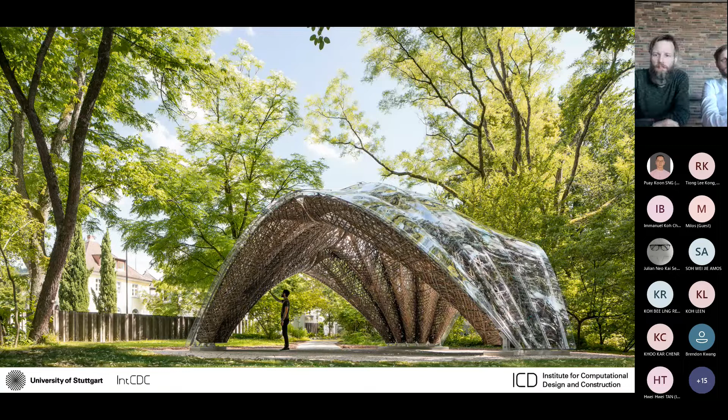And we recently started to incorporate natural fibers into our coreless filament winding process. And this is the first implementation on an architectural scale of using this new material system. This is the LivMatS pavilion in Freiburg in southern Germany that we completed last year. It's a project that started as a studio project in our ITECH master program. And it is basically a load-bearing flax fiber structure that consists of 15 components. All of them are robotically prefabricated exclusively from continuous flax fibers. And the elements are between 4.5 and 5.5 meters long, and each one is around 105 kilograms.

I think this is a very promising first implementation of natural fibers in coreless filament winding, and we made the compatibility of fabrication methods and also of our fabrication equipment with natural fibers a key part of our future research. We also learned that transferring knowledge from one material system to another one is not trivial, and it opens up a lot of new and interesting research avenues.

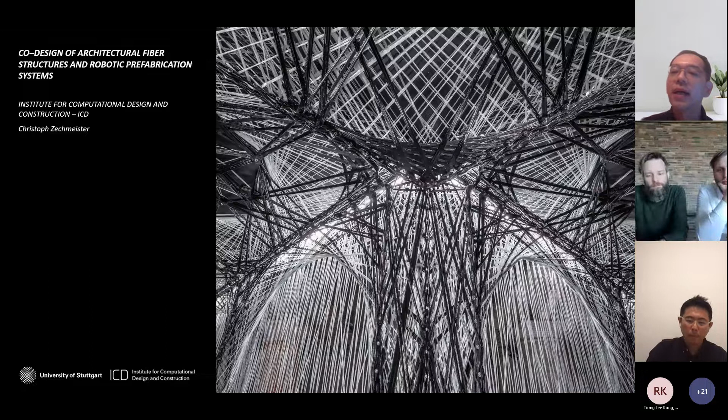Well, I don't have too many tips aside from Rhino because we use Rhino 100% of the time, and we do explore a lot of modern options like file format options like IFC, and when you look at the IFC, you realize how much of architecture can be done in the notepad. How much architecture can be done with text, because the actual visualization of 3D is less and less important. When we look at our projects, we often look at the code, the coordinates, the text, we don't even look at the 3D visualization. So there is this trend of getting away from 3D. Whatever you use to visualize 3D, it's less and less important. Even if you're using some web browser, it's much more important how you handle the data, and we handle the data through programming and code.

So my advice is to use anything that's lightweight. Don't go to these huge software packages. You have to stay lightweight. Rhino is very, very lightweight. There are some other solutions, of course, like Blender and so on, and they all work. And nowadays they all have all the tools. You just need to know what you want. But not a specific advice. Just a Rhino recommendation in general.

All right, thank you. Okay, I don't see a question coming in. I have actually one question for Immanuel. For the AI data that you've shown us, can I assume that a lot of it is about physical data, or would there be a case where we can actually get AI to learn about emotion or experiences, and can that be used in generating design?